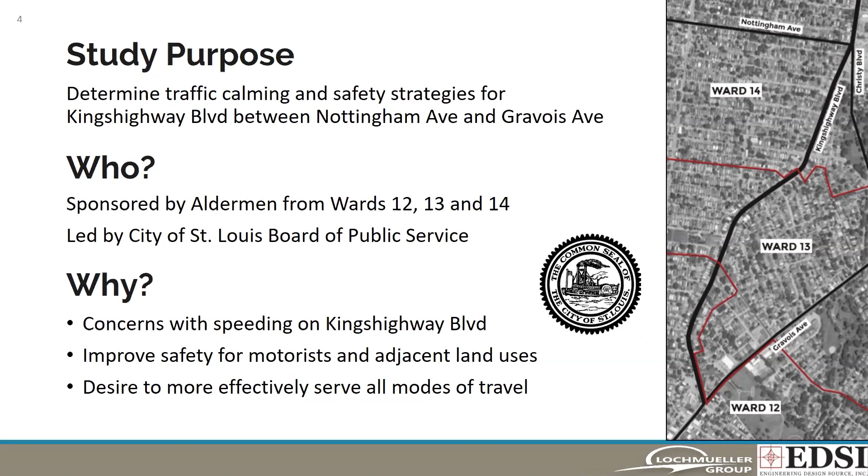We have also developed specific countermeasures for areas where there were additional safety concerns, including the intersection of Christy and Neosho, and the segment between Gresham and Bonita. And finally, we'll present how these improvements impact safety, traffic operations, speed, etc., and then costs.

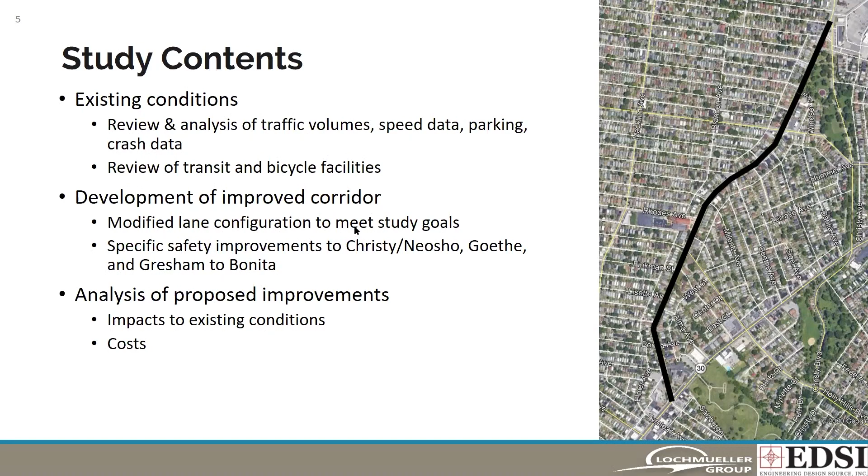In order to analyze existing conditions and produce feasible concepts, the study collected lots of different data as seen on the next couple slides. Our data was collected in 2019, so this was before COVID. The average daily traffic along Kingshighway was around 11,500 vehicles per day. In the morning, most traffic is traveling north towards 44 and 64, and the opposite is true in the afternoon.

While most traffic travels to and from the south on Kingshighway, there's also a lot of traffic that comes from Christy. We collected and analyzed turning movement counts at the signals from Nottingham to Gravois. We found that all signals operate with acceptable to favorable levels of delay and queuing for both the morning and the afternoon peak periods. Moving to bike and pedestrian data, we counted very few bicycles.

However, this is not unexpected. Currently, there are no bicycle facilities on the road, and with the cars traveling at higher speeds, this is not a welcoming environment for these users. Most intersections saw at least a few pedestrians. We counted almost 100 at Schollmeyer during the peak periods. This activity is associated with the Gateway Science Academy that's located at the intersection. Many people park on the west side of the street to drop off and pick up students here, and they use this signal to cross Kingshighway.

As for speeds, the concerns that initiated the study were validated with the data we collected. While the speed limit is 35 miles per hour, 85th percentile speeds were 40 and 41 at the two spots that we collected data. And these are the speeds in between traffic signals. The highest speeds recorded along the corridor were between 50 and 65, and the very highest, those in the 60 to 65 range, were recorded more to the south, not far from the curve at Gresham.

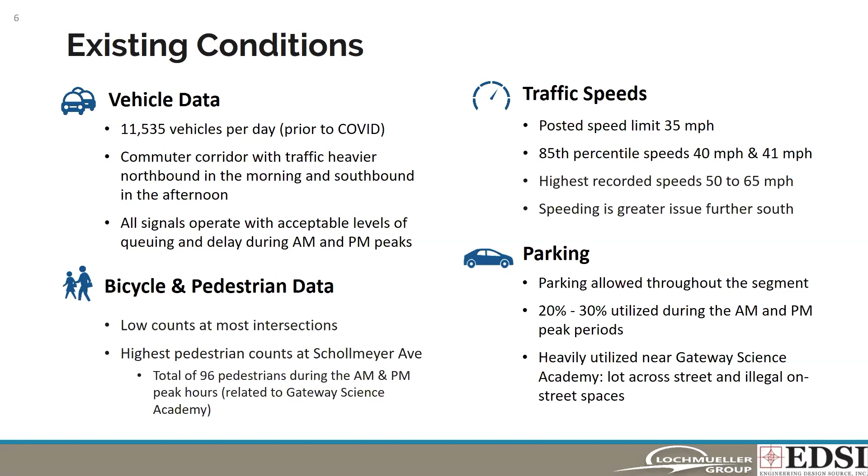Another piece of data collected was crash history from 2014 to 2018. There were nearly 400 crashes in that 5-year period. The charts on the slide break down the most common crash types and the severity of crashes. As you can see, the most common types were rear end, parking, and right angle, that being like a T-bone crash. These types are common on arterials with frequent signals, especially when speeding is prevalent. The heat map on the right is a plot of all the crashes, and you do see the greatest concentrations at the signals.

As for severity, crashes in general are classified as being either property damage only, minor injury, disabling injury, or fatal. On Kingshighway, you can see that the majority of crashes were property damage only. Around a quarter of crashes were minor injury, and there was a total of 4 disabling and 3 fatal crashes. And of the 3 fatal, 2 of those occurred at Gravois.

Looking again at the heat map, the highest crash locations included the signals at Nottingham and Neosho, at the north end of the project limits, and then Gravois at the south. This map helped us reveal an unexpected location there at Holly Hills. After seeing this, we went out and did more observations and discovered a few factors for this.

Eastbound traffic at Holly Hills is heavier in the afternoon peak, and many are crossing all 4 lanes of Kingshighway. Not only is that a long distance to cross, we found poor visibility from the side streets. Higher speeds on that segment also make the road more dangerous with these conditions.

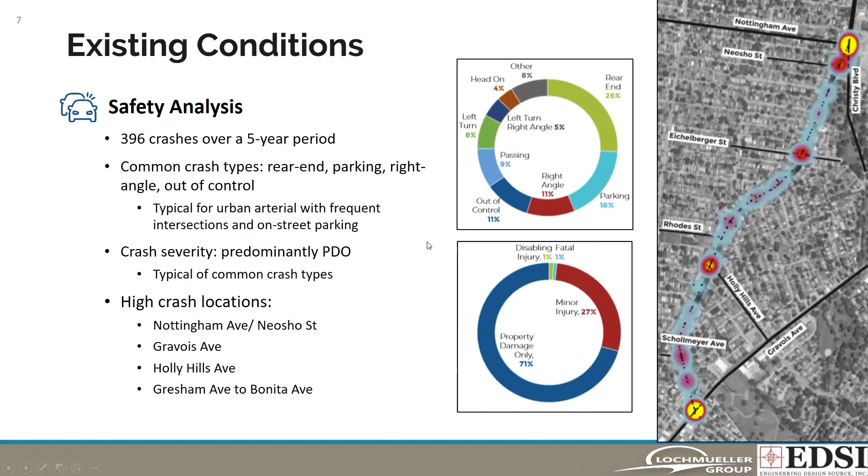And finally, we did a review of the bus routes and bicycle network in the area. This segment is served by the number 95 Metrobus. That is a north-south route along Kingshighway, and there are 7 northbound and 7 southbound stops between Nottingham and Gravois.

And now looking at the Bike St. Louis map to the right, the study segment shown in light blue is surrounded by a network of shared lanes and dedicated bike lanes. At the south end of our project, Gravois has a mix of shared and dedicated lanes and provides connections to the Christy and River des Peres Greenways. Tower Grove Park and Forest Park can be accessed via a network of shared lanes on Eichelberger, Wary, and Macklind.

And this wraps up our section on existing conditions. Again, all of this information was used to develop improvements for Kingshighway that would calm traffic and make it safer, and we will present those now.

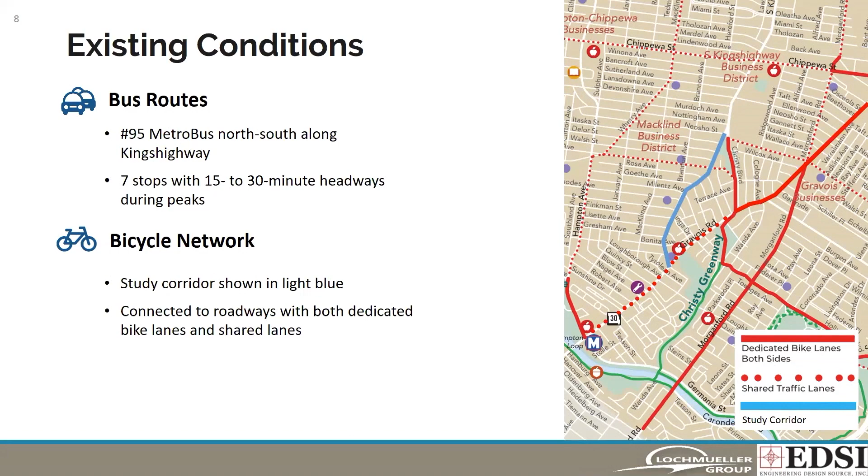The biggest benefit to this lane configuration is the safety improvements it will bring. A lane reduction from 4 to 3 has been shown to reduce crashes by 29%. For this segment of Kingshighway, that equates to 115 crashes over 5 years, or 23 annually. Speeds are also expected to decrease by 5 miles per hour, bringing the average speeds right around the speed limit.

And I mentioned Holly Hills earlier. Going back to that example, this concept would reduce crashes here by 1, decreasing the speeds, 2, reducing the total width and number of lanes being crossed by the vehicle, and 3, side street vehicles having a better view of traffic on Kingshighway, since they will be moved more towards the center of the roadway.

Lane reductions from 4 to 3 are very common in the United States and have been studied extensively. That is how we're able to predict the safety and speed adjustments. And we also know that these conversions work best when daily traffic is 20,000 vehicles or less. From our counts, this portion of Kingshighway carries less than 12,000 vehicles per day. So this lane configuration is expected to operate well.

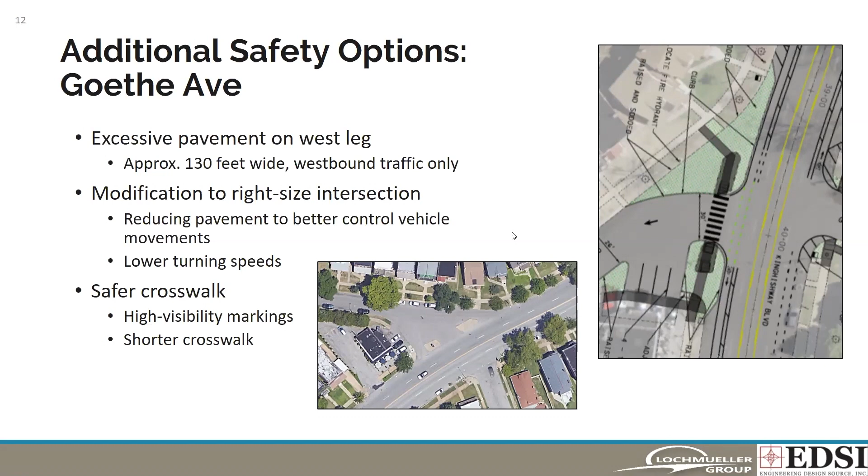And the second option, this is a concept to modify the intersections of Christy Boulevard and Neosho Street. The existing configuration is excessively large, and its operation, how traffic goes to and from Kingshighway, Neosho, and Christy, is irregular and causes confusion. Like Goethe, these intersections have excessive pavement, there are uncontrolled movements, and many places for crashes to occur, and it is certainly not safe for pedestrians.

And the crash data validates these concerns. The segment we're looking at right now actually made up 30% of the crashes in the last 5 years, those crashes that we looked at. So because of this crash history, more time was spent coming up with ideas to make this intersection or these grouping of intersections safer and easier to navigate. It also meant more drastic improvements could be necessary to make a difference.

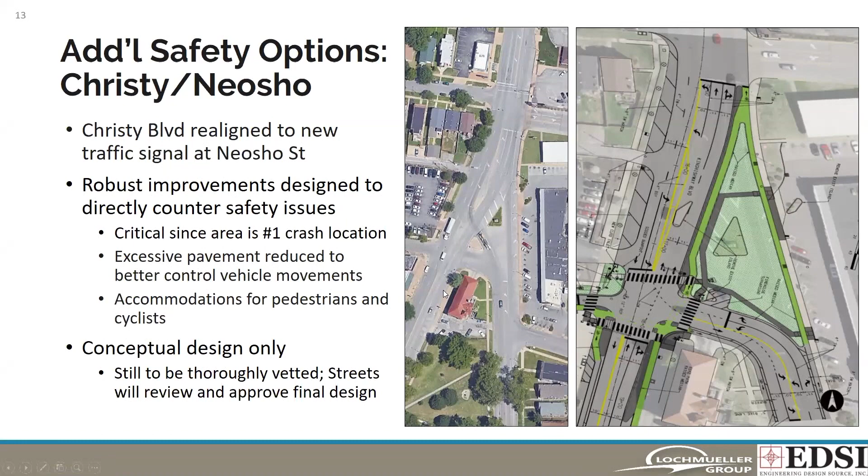And now all of the concepts have been presented. We will move on to costs. The baseline recommendation, which included the new lane configuration, intersection improvements at Eichelberger, Rhodes, and Schollmeyer, new ADA curb ramps along the entire project, and the modification between Gresham and Bonita, this comes to a total of 1.3 million. This cost also includes repaving the streets so you don't see remnants of the old roadway configuration, as well as signing and striping for the bike lanes and parking.

The two additional options we discussed were at Goethe and then Christy and Neosho. The cost to reduce the size of the intersection at Goethe would be 34,000, and the improvements shown for Christy and Neosho would be close to 330,000. The cost to implement everything would be about 1.7 million. It was important to the Alderwoman that the study's recommendations be split up into a few options like you're seeing now. It is also important to them that you know that this work can be implemented in segments and adopted as funding is available.

A recap of the benefits for the proposed improvements are shown on the slide. This project really would have an impact on safety. Like I said, there's a lot of data out there about the 4 to 3 lane reductions, and that change alone would be expected to decrease crashes by almost 1/3 along this segment. And then additional improvements were designed for high crash areas to make further substantial reductions. The lane conversion is expected to slow traffic down by about 5 miles per hour, which would get average speeds closer to the speed limit.

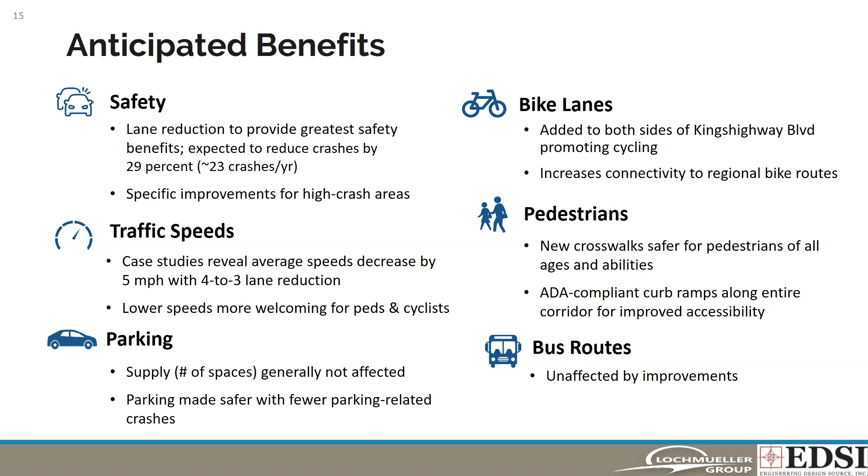Potential drawbacks include increased congestion, or at least the perception of it. In particular, the lane reduction does not provide for passing around slower moving vehicles. And for those traveling to and from Christy, they will now have to use a traffic signal. The right turn in the morning could see longer queues, but again, it's all expected to operate well even during the peak hours. Also, due to the lane reduction, there's the potential for some traffic to divert away from the reconfigured corridor. The north-south routes on either side of Kingshighway, where this could potentially go to, those would be Macklind and Morganford, and estimates for diversions are between 2 and 15% of traffic.

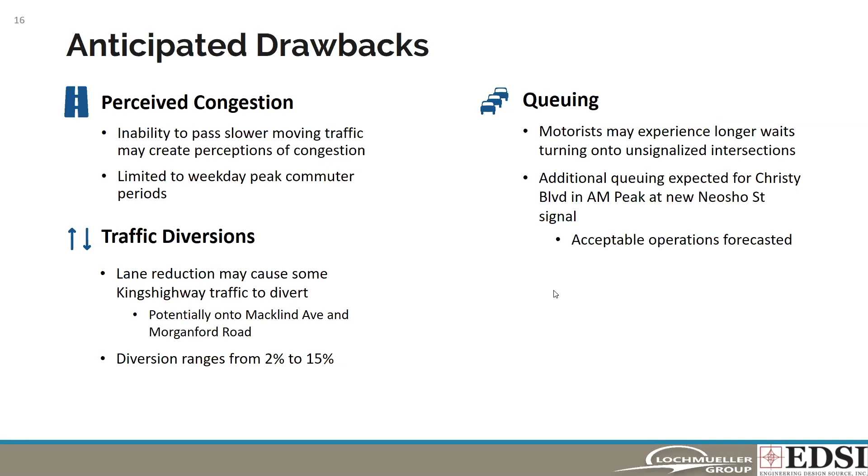And that concludes our presentation of the Kingshighway Safety Study. I hope that you found this informative. As mentioned, everything we just shared is at the conceptual level, and now your alderwoman would like to hear from you. If you haven't already, you can put your questions in the Q&A box, and those can be answered by the alderman, city staff, or Lochmueller Group. So we will go to those now.

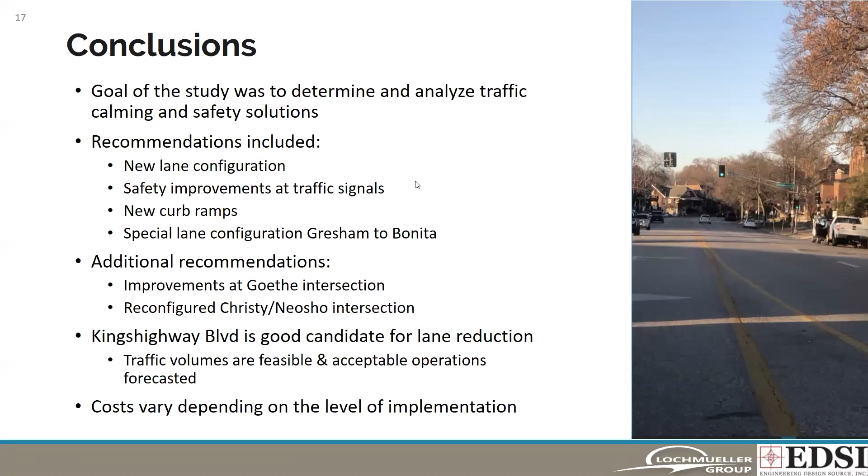Thanks, Kelly. The first question we have comes from Michael Hayes. Can you explain a little more how the raised concrete barrier will be positioned between Gresham and Bonita? Well, let's start with that first part of that question. Can you explain how it will be positioned between Gresham and Bonita? So Kelly or Chris, can you talk about what you had proposed? I think it's a 4-inch curb, where the placement is.

So the median itself is, can you see my mouse? Did I share everything? Yes. Okay. So the median itself is 7 feet wide. It's 7 feet off of the curb. This space will now be for the bicycles. So the parking does go away between these two intersections. And I believe it's a 6-inch curb. And how high will this barrier be? How tall will it be? 6 inches. And then the final part of that question, will anything be done with the Schoemehl pots?

Alderwoman, that I don't have an answer for. Yeah, Vicky Grass, I think the option is they can stay or they can go. I think that's what we talked about in a previous meeting. I think it would be up to the homeowners. I'm not certain of that. Street department might have something to say about it, but Scott, can you answer? Sure. Can you hear me? Yes.

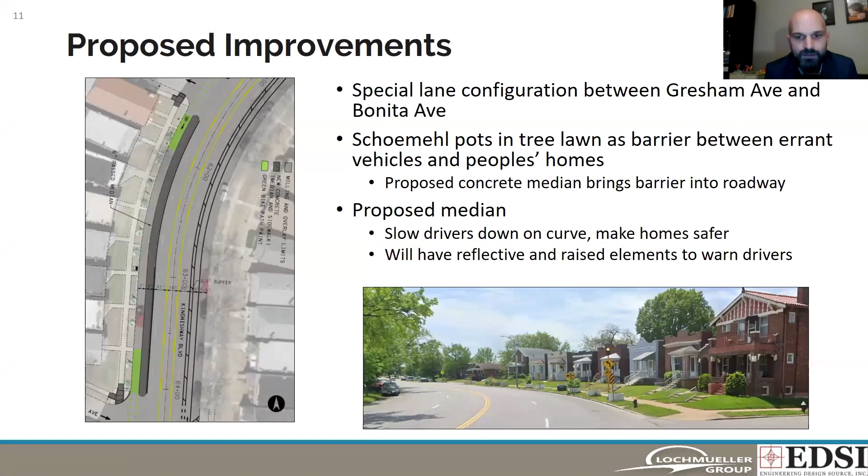Yeah, so let's talk through that a little more. Okay. So when we go from the existing 4-lane configuration to 3 lanes, we have more space to work with then. And if we don't have the bike lanes, the vehicular lanes become too wide, and you'll either get excessive speeding or you'll get driver behavior where drivers try to use that center turn lane as a passing lane if it's too wide. And we want to avoid that.

Now, the bike lane provides a new facility for cyclists, but it also does some things for drivers as well. So the 2 big things it does, it leads to fewer accidents with parked cars because we've moved the moving vehicle 8 feet away from the parked car compared to now where the vehicle in the adjacent lane is very close to parked cars. And the second thing it does for people who are parking on the street is it creates that space for them to get out of the car that is farther away from a moving vehicle.

So for a homeowner or a visitor who lives in this corridor, having the bike lane there, we think will lead to fewer circumstances where their parked car is damaged by another driver, and a little bit more comfortable experience just getting in and out of the car because they'll be farther away from moving vehicles.

And the cost, I think there was a question about the cost. The cost drivers of this project are not really the striping. It's primarily the repaving and the intersection modification on the north end. So the additional striping, there's certainly some cost to it, but it's a pretty small percentage of the overall cost of the project.

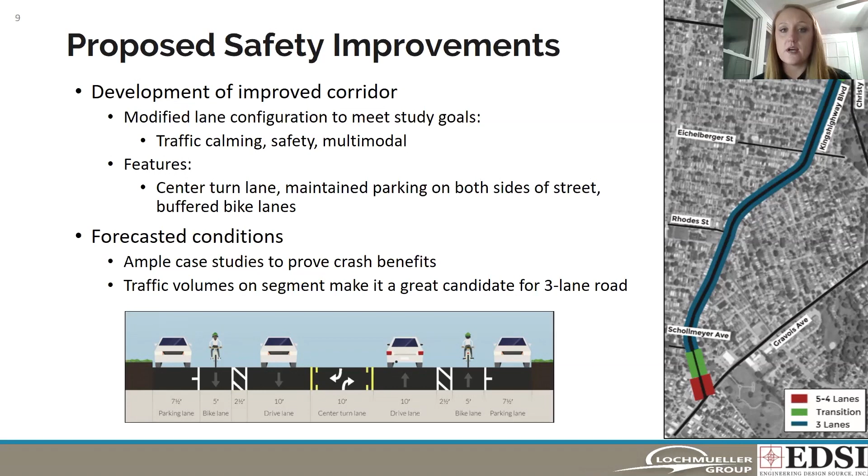Certainly the additional traffic that is present during the peak hours is a factor that slows people down. I think one way that it would slow down in the middle of the night, like you're saying, is if the concrete medians are built at the signals. So then that reinforces that cross section at the signals. So there is that potential there.

All right, the next question comes from the Firecracker Press. He asks, what about the block north of Gresham? As cars lose control around the curve, they often end up wrecking into property north of the curve between Gresham and Lizette.

This wasn't specifically addressed in our design, but it could be if that is a concern; when we go into final, that could be considered then. And that's exactly what this public meeting is for, is to get the input so that we can understand your exact current concerns and individual concerns and how they can be worked into anything that goes into implementation.

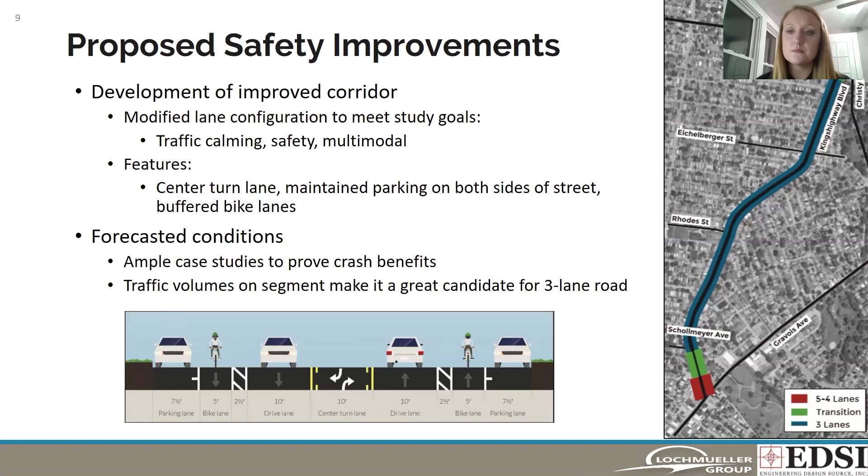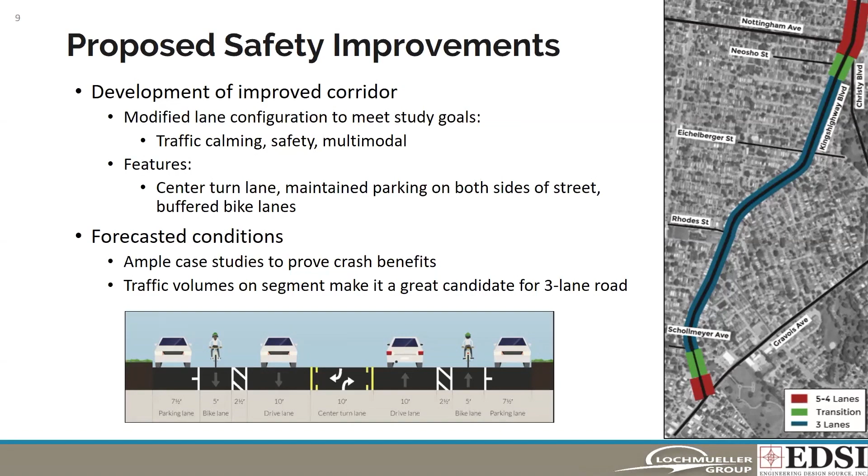Thank you, Kelly. Lawrence, I'm hoping I get your question right. So he asked on slide 14, if we can go to slide 14. Have we addressed this? I think we, Brennan? It was about the, we can do paving and striping and nothing else. So I do believe we've answered this question for you, Lawrence.

The next question is, how much money does each ward involved currently have in their improvement fund? So that would be for the alders. I'll go. Currently, I think in my ward capital, I might have, I'd say maybe 200,000 right now, but that can't all be used for this. Out of the ward capital, we have to take care of the entire ward, you know, from dumpsters to streetlights to paving to alleys.

I don't know, offhand, also trees, sidewalks. That's what I would say. And I have some outstanding projects that aren't finished yet, and so that will come out of that also. I don't know how much will be allocated this coming budget with the COVID and all that going on, the revenue shrinking. But I believe that's what I have about now. But I have outstanding projects in that also. So I hope that answers your question for me.

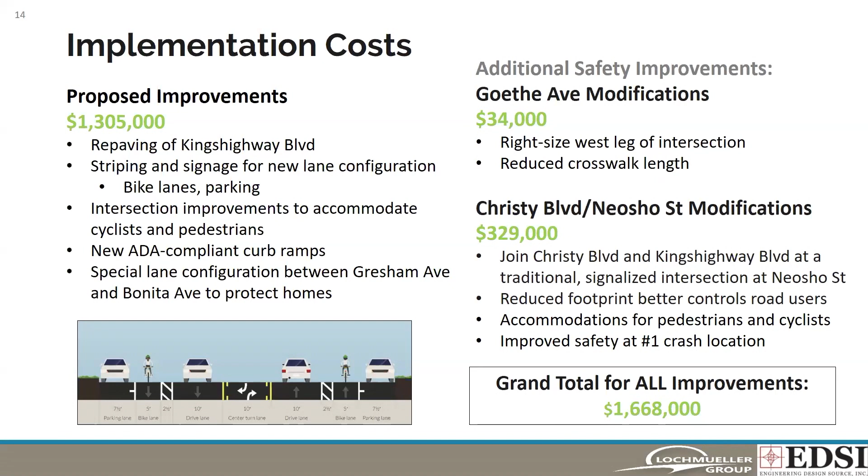Thank you. And the final question actually comes from Bev. She was a little late to the party, was asking a couple questions about some of the things we talked about this evening about Kingshighway and Gravois. And I just wanted to know where can people go to find out more information or to see this study or the information in this plan? I believe the entire study is on the city website.